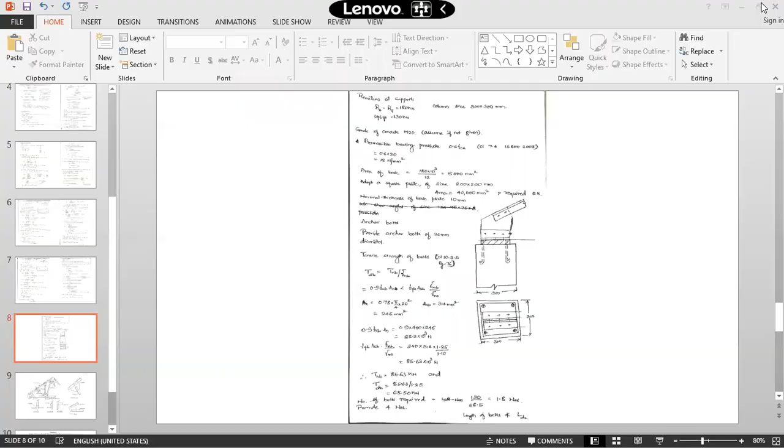Good morning. We have a very small part to be covered in the truss now. We are left with the design of base plate, which has to be explained to you. But designing the entire truss members, you have to practice them. I hope you have gone through this problem and tried solving it.

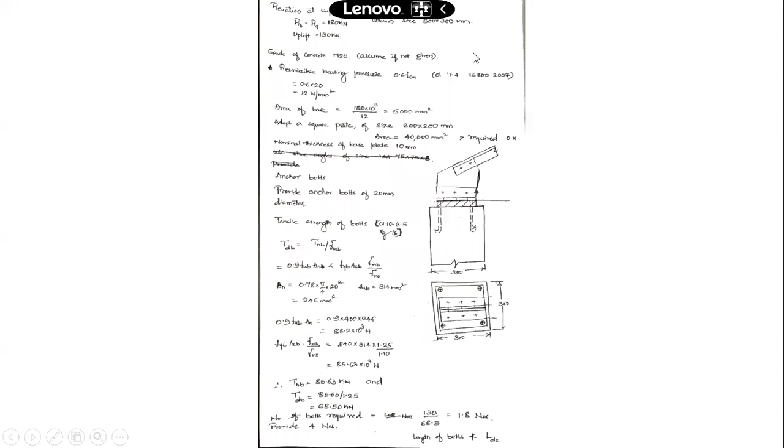Unless and until you practice, I cannot help you in any way. So once that truss design is done, this is the design of base plate, and this is what the base plate and anchor bolts have to be designed over here.

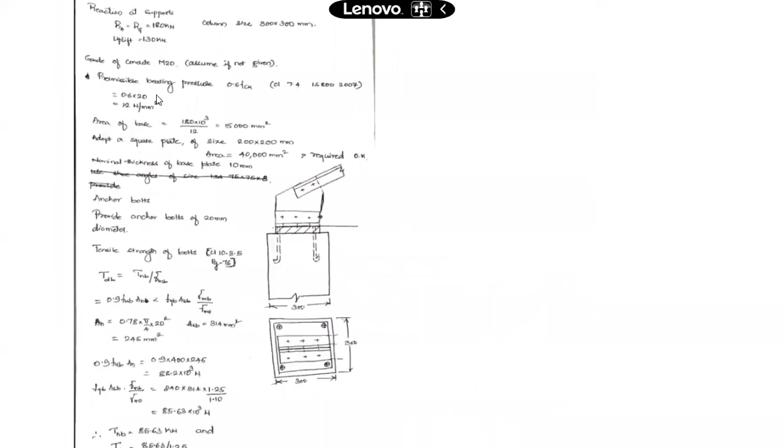In the beginning I told you there were some reactions given. I have taken these reactions. At the ends, over the support of the column, at points A and G, at the ends of the truss, you have the reactions coming over here. You have to design the proper base plate for these reactions.

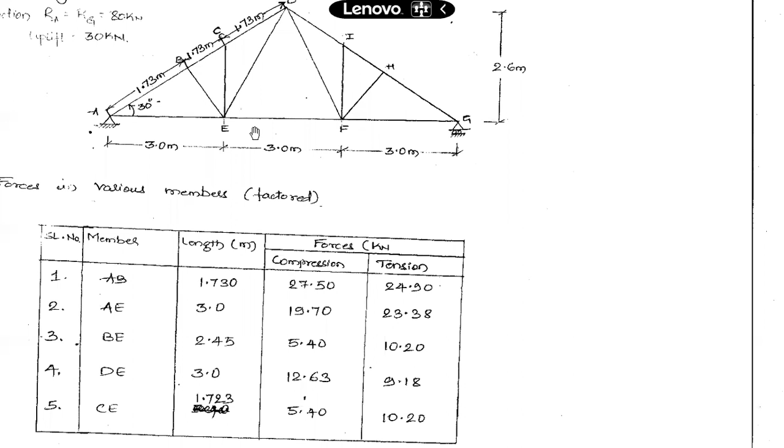There may also be uplift due to wind load, and to prevent the uplift or overturning of the truss, there should be proper anchoring arrangement. You should have bolts which will hold down the truss in position. So you need to design those anchor bolts. So first is design of base plate.

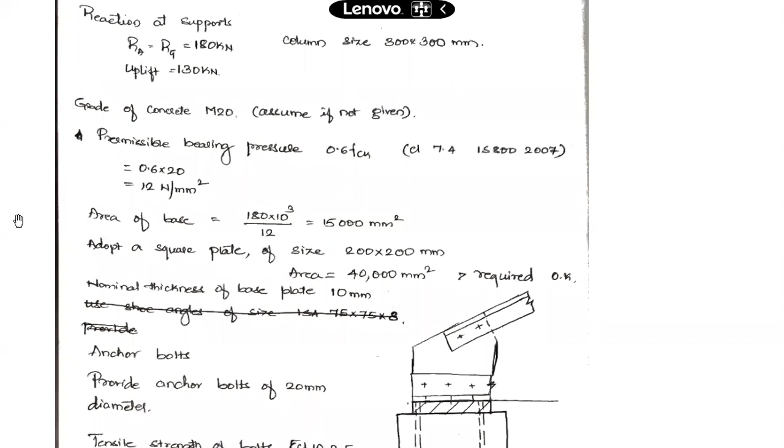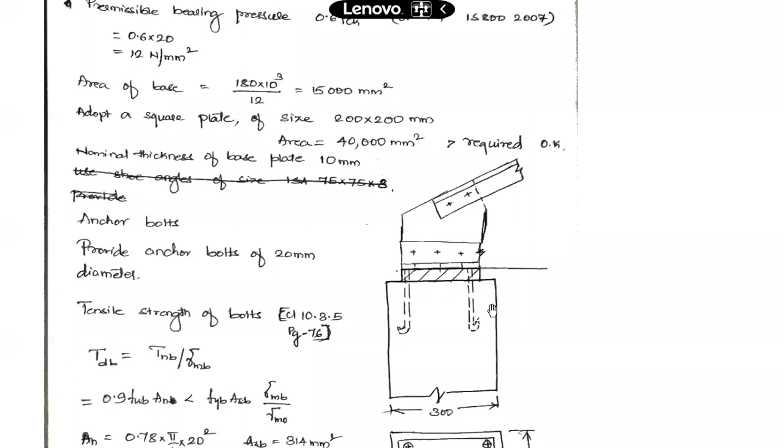Now this is a concrete column considered here. I cannot directly rest this truss on the concrete column. Normally it will result in high bearing pressure. If the angle section, the bottom tie member, is placed directly over the column, there may be crushing of the concrete at the edges, and the concrete may crack there.

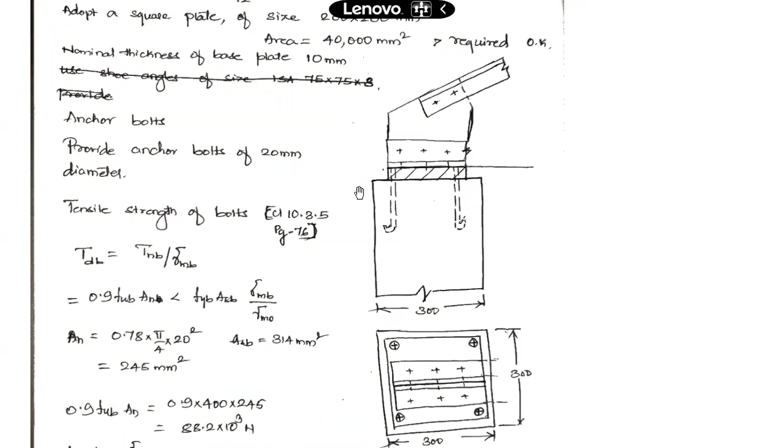To prevent this, and also to provide proper stability to the truss at the support, we need to have the base plate over there. We have to design that base plate and the anchor bolts for holding this base plate in position.

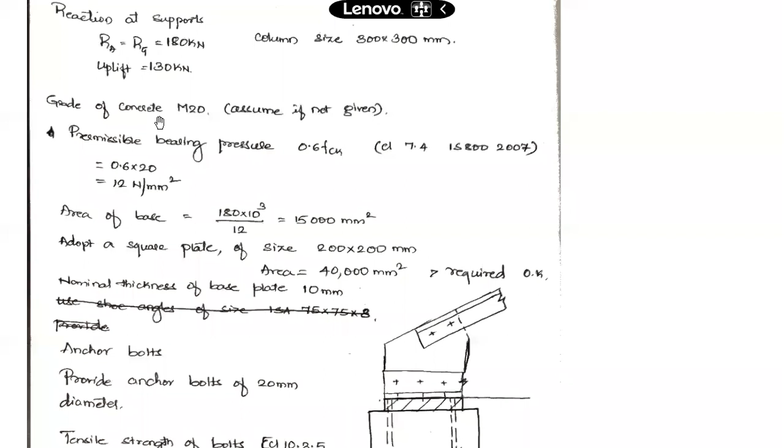So first, if you take up the design of base plate, these are the reactions at A and G. We have a reaction of 180 kilonewtons. The column size for this particular truss is 300 by 300 mm. And also there is an uplift force.

At the same supports A and G, this is a downward reaction, given as 180 kilonewton downward. What is coming here is uplift, an upward reaction. If the truss is trying to be uplifted by the wind load, there will be an upward reaction or force experienced there.

So this is due to dead load, 180 kilonewton, which will be in the vertically downward direction. This is a force in the upward direction due to the uplift experienced by the truss in any case.

Now this column is given as 300 by 300, and grade of concrete has not been mentioned in the problem. So what I have done is I have assumed it to be M20 grade. If it is not mentioned, you can go with this assumption. So now, what is the permissible bearing pressure?

This permissible bearing pressure is from our clause of IS 800:2007. If you go to clause 7.4, the permissible bearing pressure on the concrete should not exceed 0.6 times FCK. In our case, it comes out as 0.6 into 20, which is 12 Newton per mm square. This is the bearing pressure allowable on the concrete.

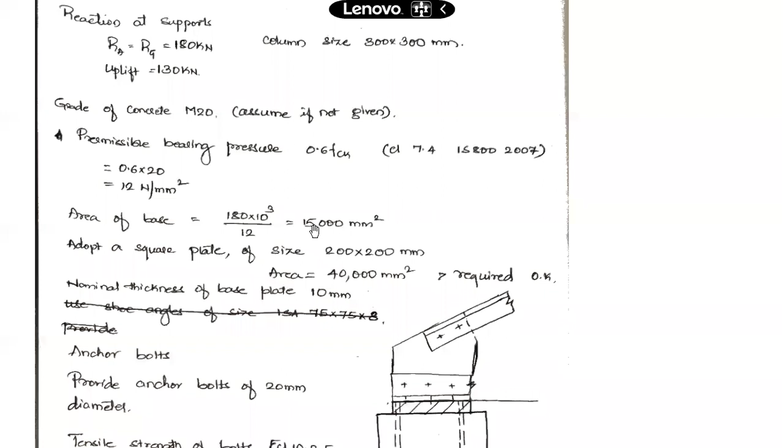So either 10 or 12 is sufficient. Out of these two, any one thickness you provide. This completes the size of the bearing plate. Plan area is 200 by 200 and thickness is 10 thick. That is one part, what has to be decided on the support, one of the member, bearing plate.

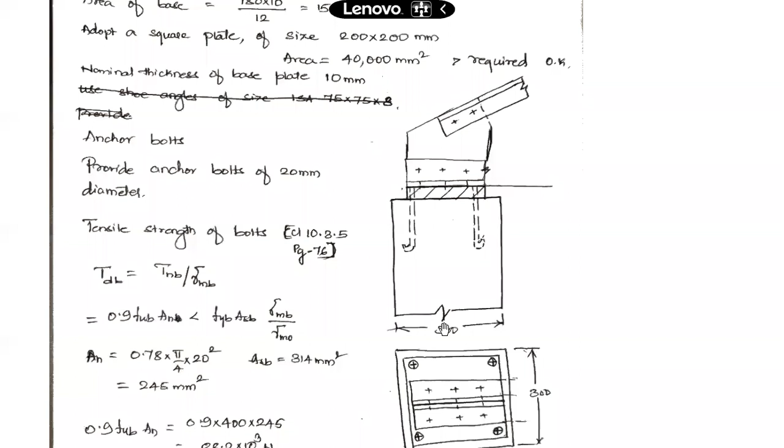Now, other than that, we have anchor bolts. This bearing plate, what we decided was based on the downward force, this 180 kilonewton force. Now, we also need to take care of this uplift force of 130 kilonewtons.

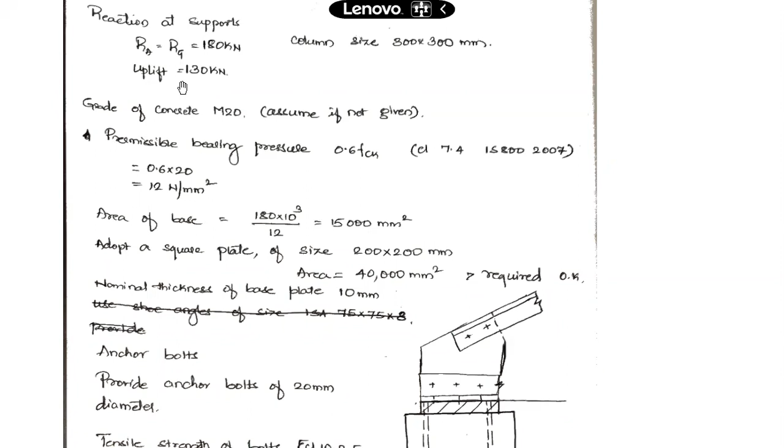So what you have to do is you need to provide proper anchor bolts. These are the J bolts. At the end, so you'll find such J hooks. They are mainly meant to have proper anchorage. So these bolts have to be provided here.

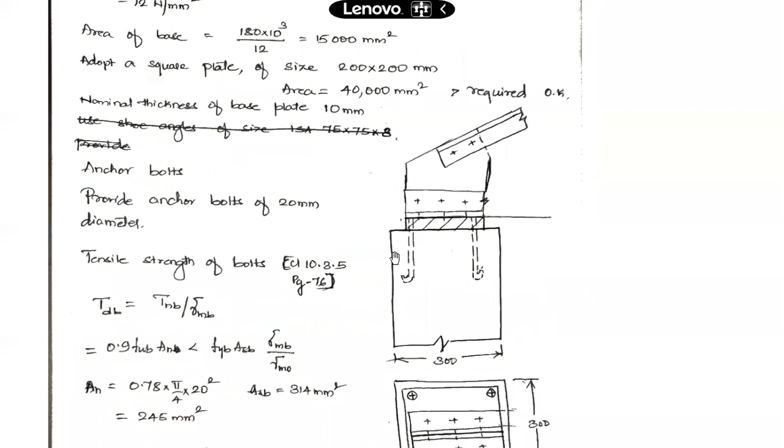So these anchor bolts will be based on what is the uplift force here. On that basis, we will decide the size of the anchor bolts. So if I adopt 20 diameter bolts, I have used 20 diameter as the anchor bolt size here. The class of bolts, I have taken the same class, 4.6 grade.

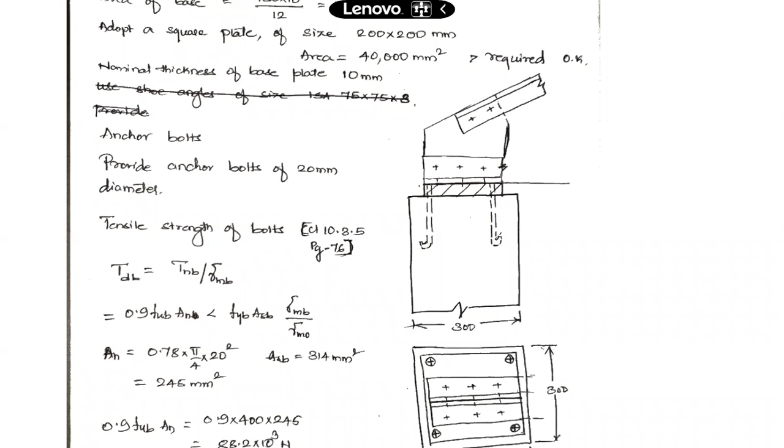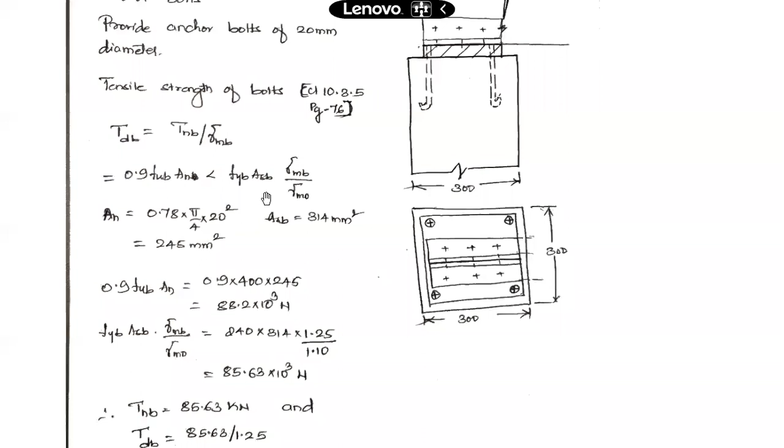So from this, what is the strength in tension? We also have design strength for these bolts under tension here. From IS 800 only, you will get those design tensile strength of the bolts.

Till now, what we have seen was the strength of the bolts under shearing and bearing. So these two strengths we have checked over there, we already have dealt with them. We have only come across such strength under shearing, single shear, double shear, or in bearing. That is what we have used.

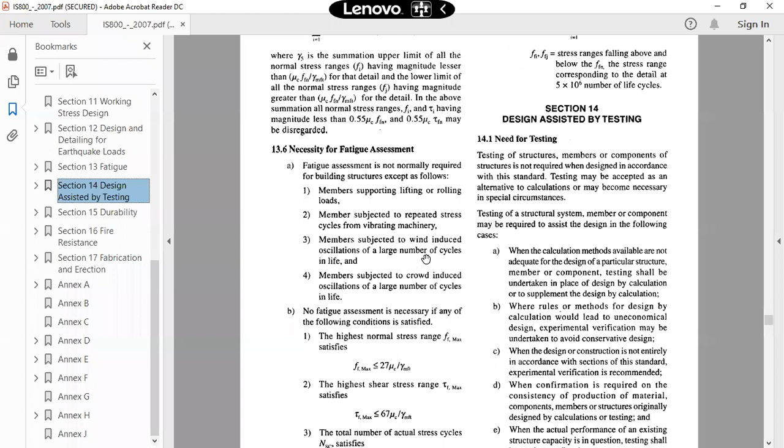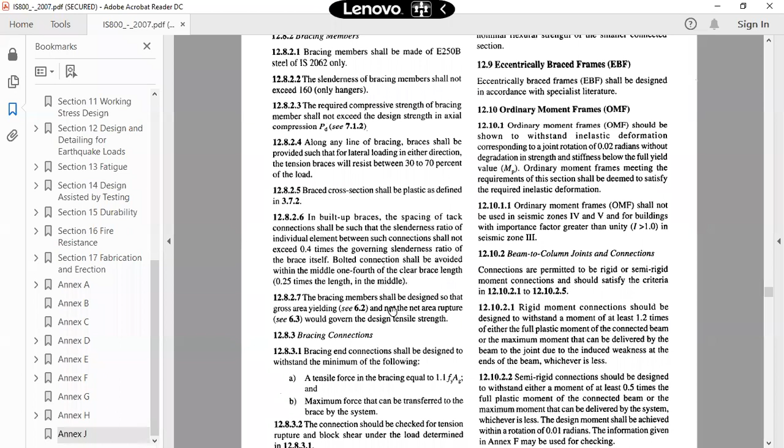But in this case, what is happening here is there is a direct tensile force that is being resisted by the bolts. So we have to decide what should be the size of the bolts based on that direct tension. So the clause you'll find that, and in that you'll also see that you can calculate the design tensile strength of the bolts.

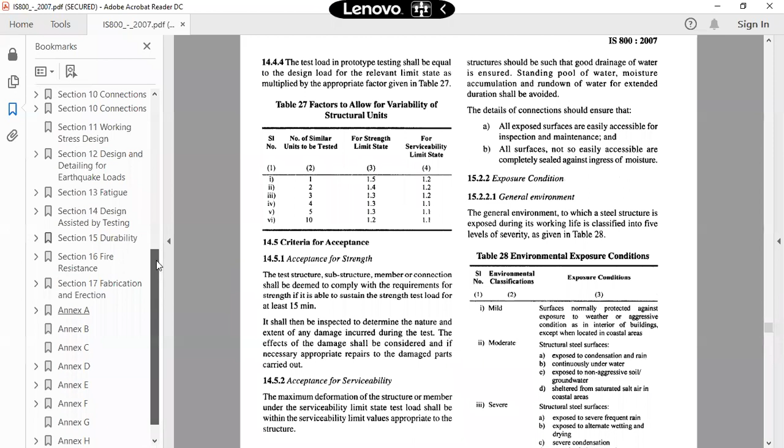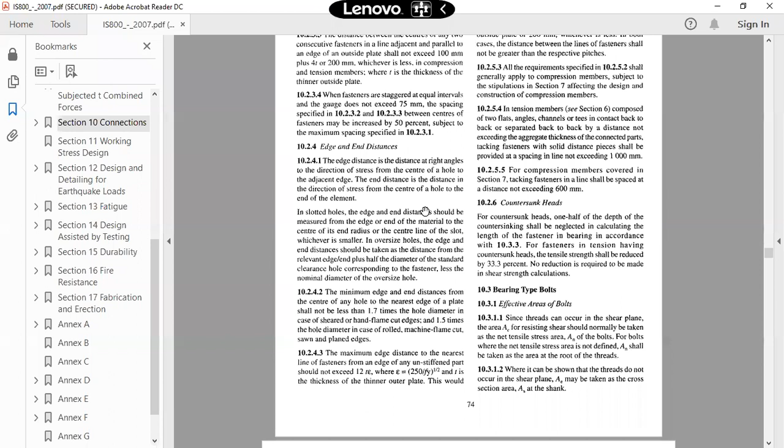Tension capacity, this is the tensile capacity of the bolt. TDB, which is equal to TNB upon gamma MB. Tension capacity of the bolts.

So this capacity, what I have mentioned here, is calculated from this clause 10.3.5. TDB, which is equal to TNB upon gamma MB, and TNB is to be calculated from this expression: 0.9 FUB, and that should not exceed FYB into ASB into gamma MB upon gamma M naught.

AN is the net area at the roots, 0.78 times the gross area, that is AN. ASB, the area at the shank portion of the bolt, which will be based on the nominal diameter or the gross diameter of the bolt, pi by 4 into whatever is the diameter of the bolt, that square. That is how ASB is calculated.

AN will be the net area, 0.78 times the gross area. FUB is the ultimate tensile strength of the bolt, and FYB is the yield stress of the bolt. Okay, gamma MB and gamma M naught.

Gamma MB will be 1.25, whether it is field fabrication or shop fabrication, this is the factor of safety for bolts. Gamma M naught, the factor of safety for yielding, is 1.1.

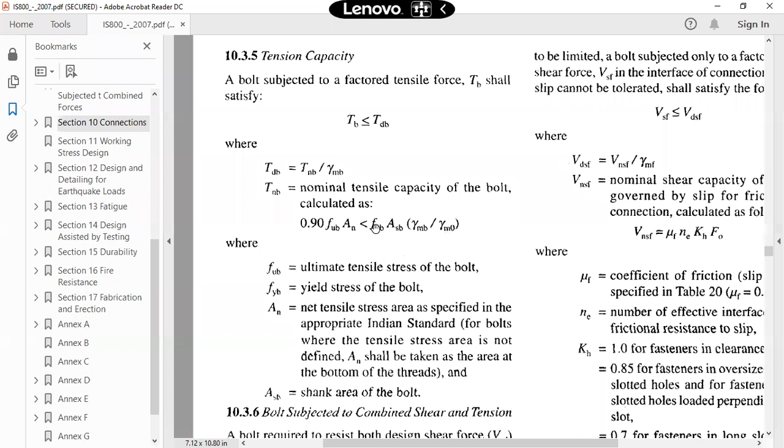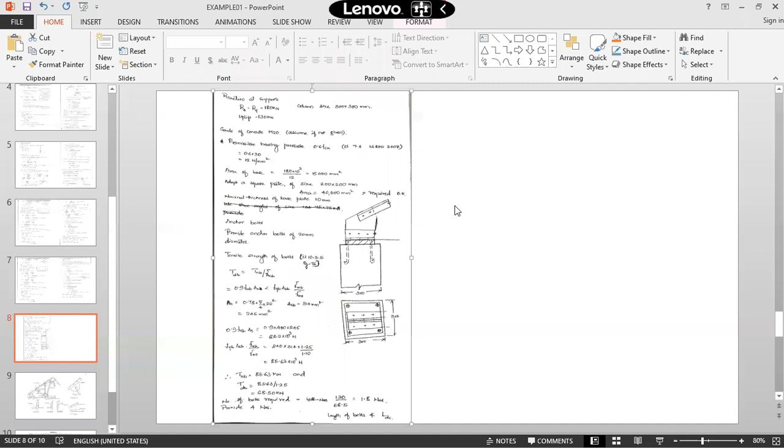So this clause will help you in determining the tensile capacity of the bolt, the design strength of the bolt under tension. I have taken that from clause 10.3.5, page 76.

Tensile strength of the bolt, TDB, which is equal to TNB upon gamma MB, and in turn TNB will be 0.9 FUB into AN, and you should check that it is less than FYB into ASB into gamma MB by gamma M naught. AN is 0.78 times the gross area.

0.78 into pi by 4 into 20 square, the diameter of the bolt, gives the net area of 245 square mm. The area at the shank portion is simply pi by 4 into 20 square, which is 314 square mm.

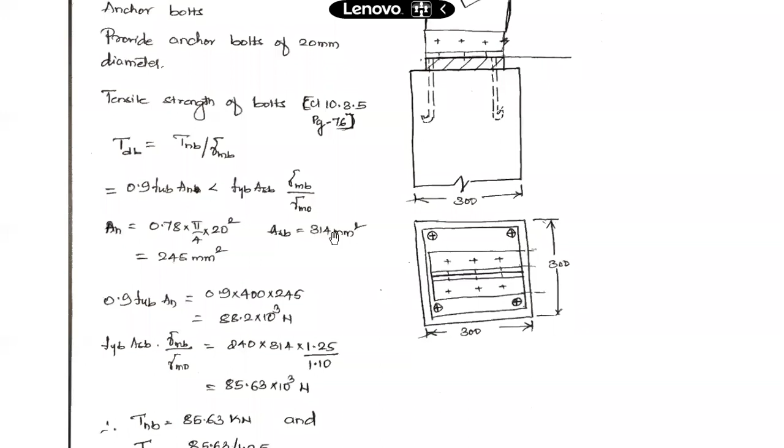On substituting in that equation, the nominal tensile capacity comes out to be 85.63. One term, 0.9 FUB into AN, gives 88.2, whereas the term on the right hand side gives a strength of 85.63 into 10 raised to 3 Newton.

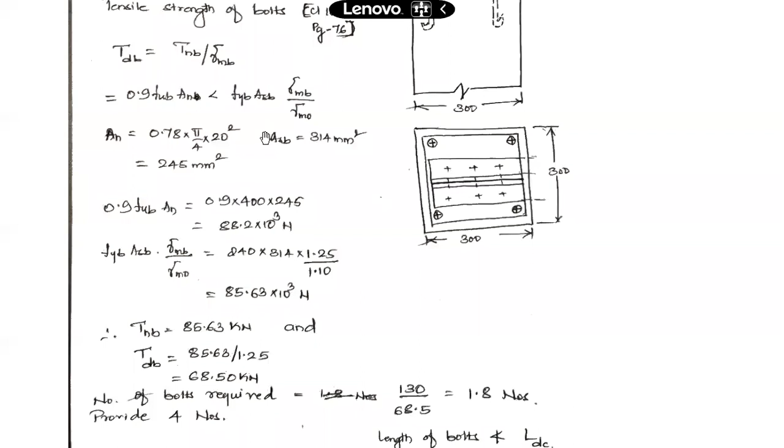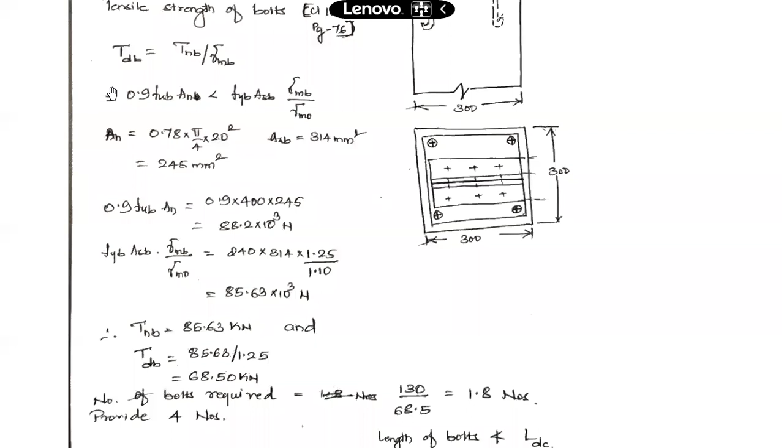Out of these two, whatever is least is adopted. This value of 0.9 FUB into AN exceeds FYB ASB into gamma MB by gamma M naught, so this 85.63 kilonewton, from FYB ASB into gamma MB by gamma M naught, has been taken as TNB here.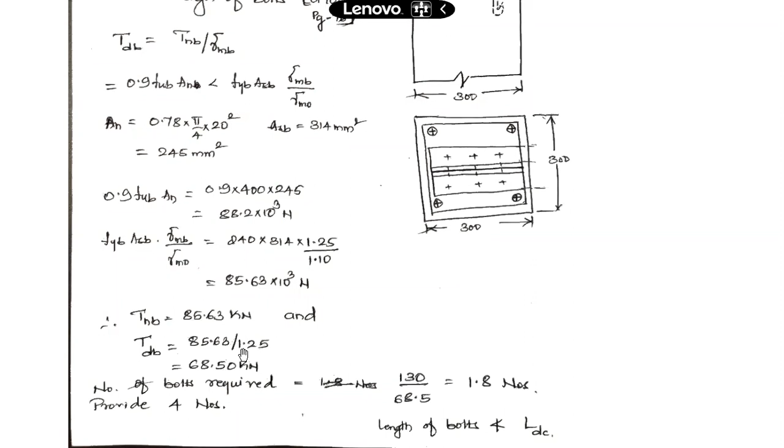So on this basis we have decided the design strength under tension for these bolts of 20 diameter. It will be 85.63 divided by gamma MB 1.25, which comes out to be 68.5 kilonewton. This is the strength under tension.

Is that clear? Like we did the calculation for strength of the bolt in shearing, single shear, double shear, and bearing, this is one more strength, what is there under direct tension. So that has been done over here.

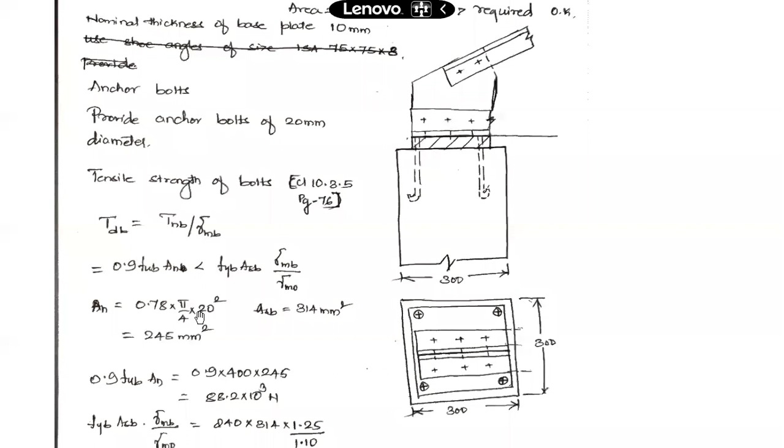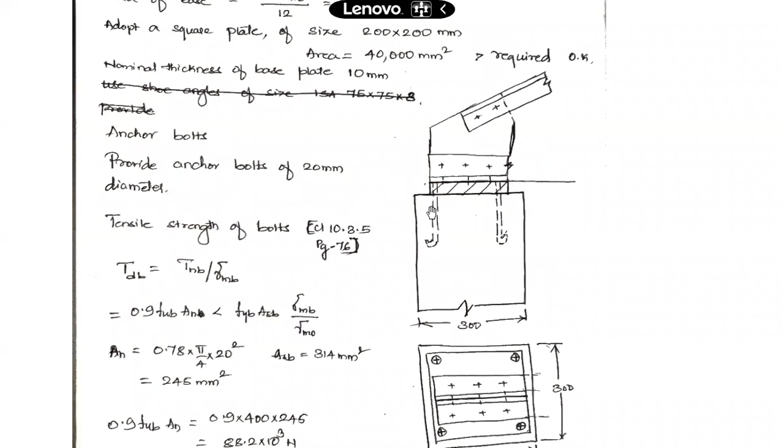Because these bolts are subjected to direct tension, uplift, direct pull is there on these bolts, so I need to know what is the strength under direct tension for these bolts. So this is what the strength is, 68.5 kilonewtons.

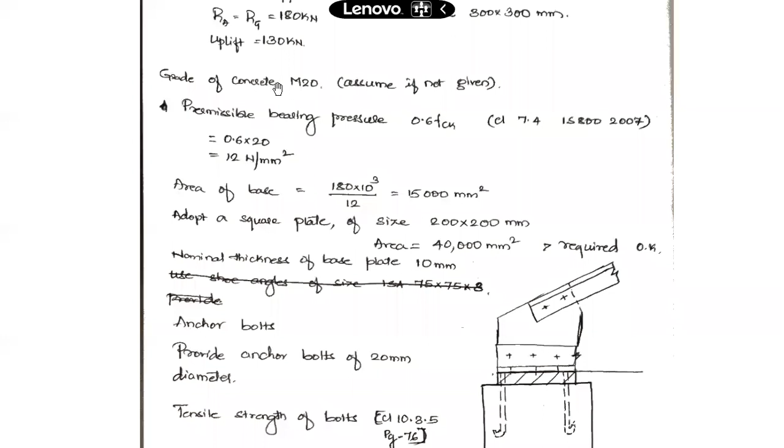Now what number of bolts have to be provided? Whatever is the uplift force, this 130 factored uplift force, 130 kilonewton, divided by strength of bolt, gives me 1.8 numbers. You require 1.8 bolts, but I cannot provide that.

What we'll do is provide 4 bolts, one at each corner of this base plate. Minimum 4 bolts have to be provided there, one at each corner of the base plate. Sometimes you may come across more than 4, in that case you can arrange them along the edge of the base plate. So here we are providing minimum 4 numbers.

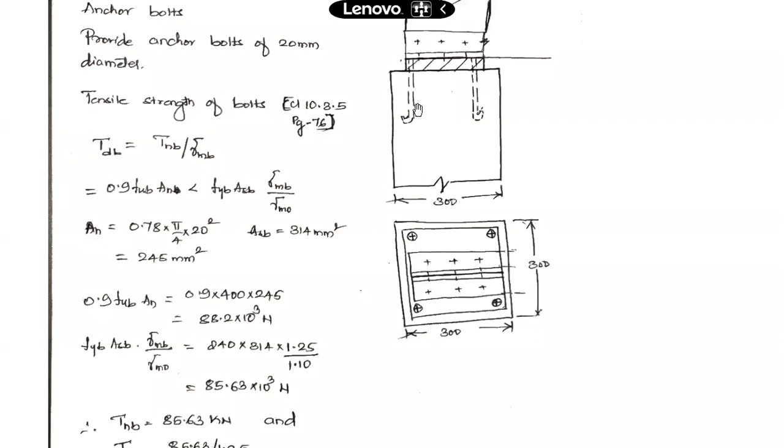So diameter of bolt is 20, number of bolts is 4, and also this length matters here, it should be having sufficient anchorage strength. So this length should be equal to the development length, development length in tension, that is the development length what you calculate for the reinforcing bar, LD.

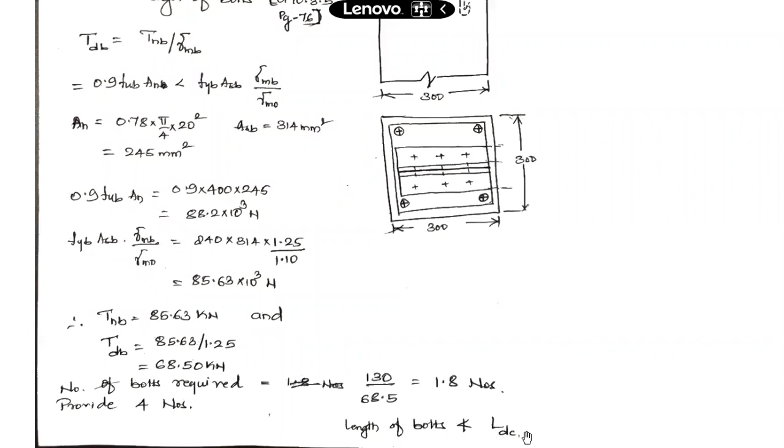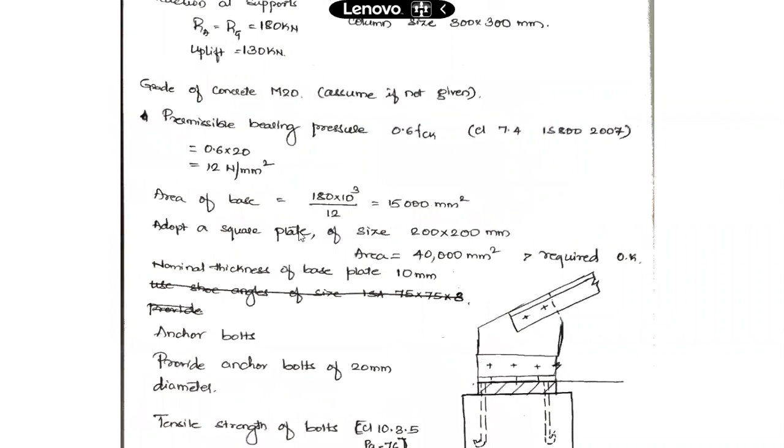You just mentioned that length of the bolt should not be less than development length, just LD, not LDC, LD, length of the bolt. So that is the anchor bolt and base plate design, what has to be done at the end of the truss design, this is one small part of that calculation.

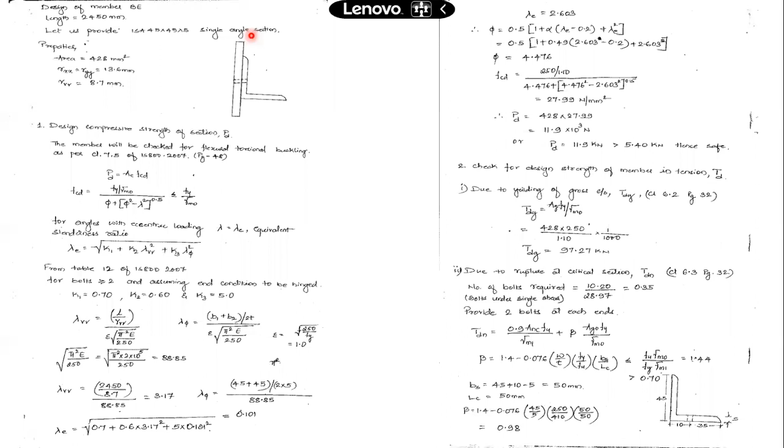So other than that, what we have gone through in this truss design is design of members, double angle arranged back to back for principal rafter and bottom tie. And one more type of design was a single angle section loaded through one leg only, which involved calculation of lambda E. And all members have to be checked for tension: design for compression, check for tension, or design for tension, check for compression, that has to be done there.

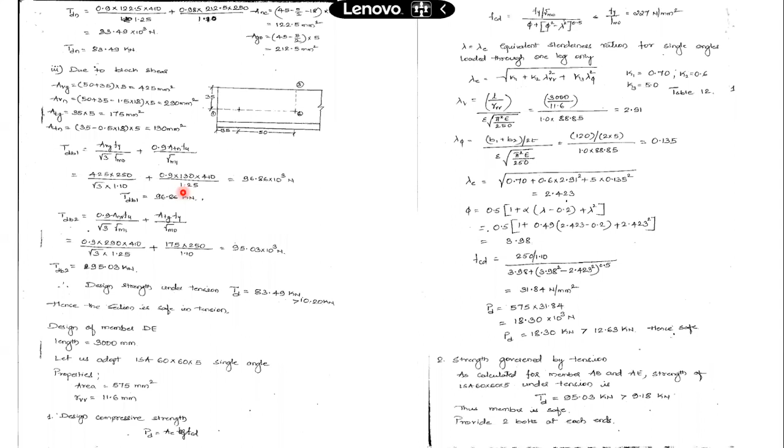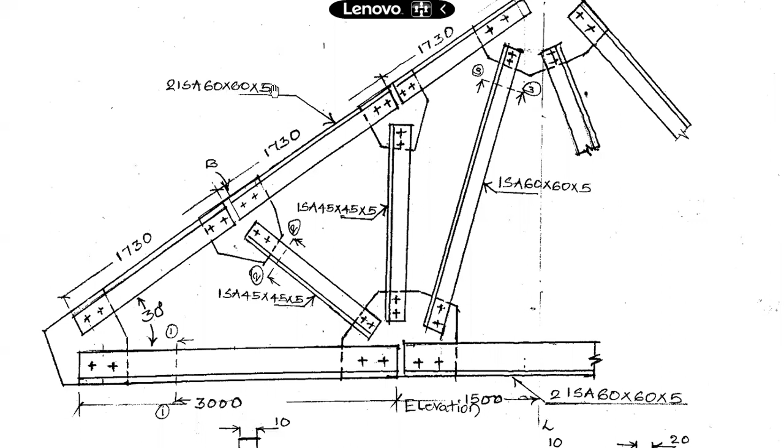Okay, so this is the connection part. This is the principal rafter. What is this member? Here we have provided two ISA 60 by 60 by 5 for this principal rafter.

For this bottom tie member, again it is 2 ISA 60 by 60 by 5. For these other members, here we have single ISA 45 by 45 by 5. For this vertical member also, we have provided a single angle section, 45 by 45 by 5. And for this member, which was 3 meters in length, we have provided a single angle section of ISA 60 by 60 by 5.

You'll come across this in your lab, in the semester detailing lab. There you have the detailing of this truss also. Once you design that in the lab, maybe the same truss or another truss, we will be detailing that.

At every joint you find these gusset plates. See that shape of gusset plate, they can accommodate the members which are connected over there. So this is the gusset plate what we have. For all, we have provided gusset plates of maybe 10 mm thickness. Yes, 10 mm thickness. So this is the arrangement of the members in the truss.

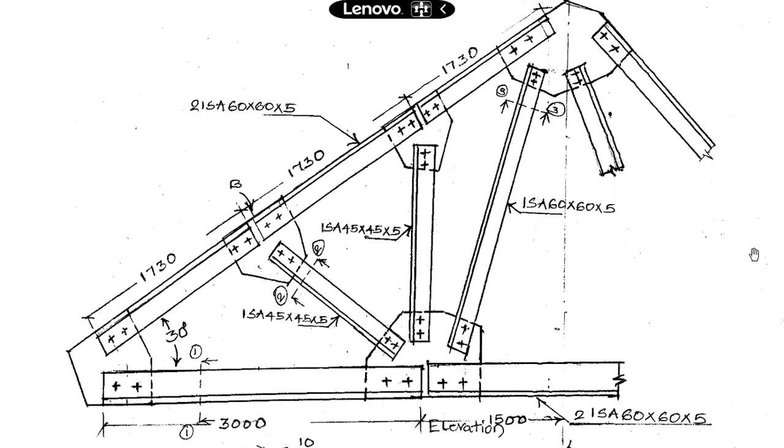Half elevation, at least the half elevation has to be shown, not the full truss. You don't have to draw the full truss, half you can draw. Anyhow you are doing it in AutoCAD, so if you are done with half, just mirror that and you will get the full truss. So this is the elevation of the truss.

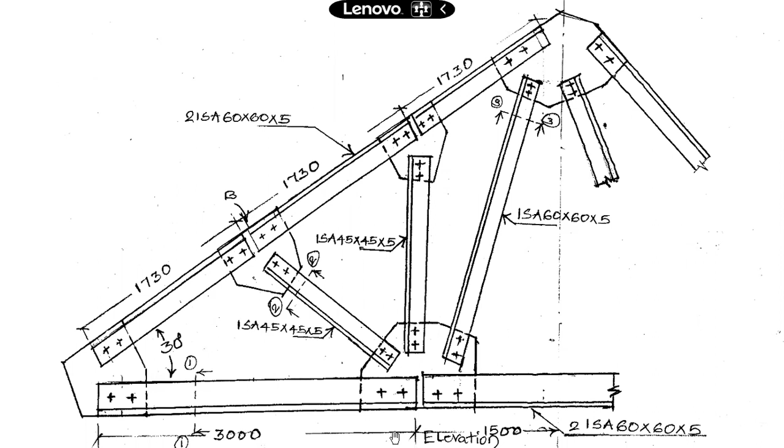Now the same sections have to be shown here, details of the joints and also the sections. So three sections: one of the bottom tie member, another section 2 for this single angle section member, and section 3 for one more single angle section. For this principal rafter and bottom tie member, the arrangement is same because they are the same angle section, 60 by 60 by 5, and they are double angle sections.

So here the arrangement of members within the truss, how they are connected back to back, ISA 60 by 60 by 5 back to back. This is section 1, which is taken at this bottom tie member. Okay, this is that section.

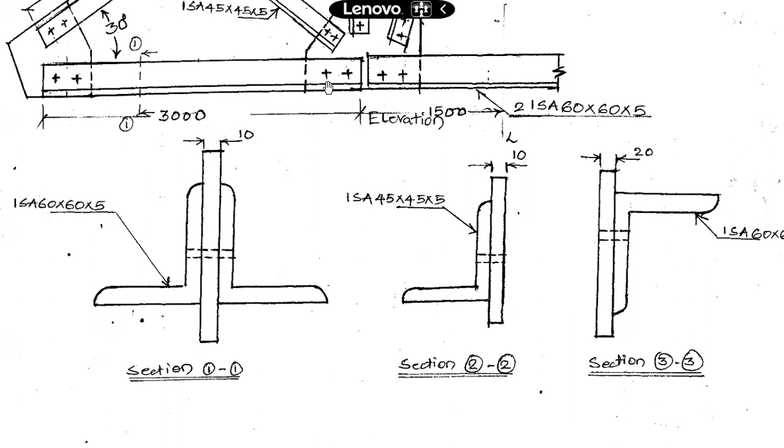This is the gusset plate in between, what you see. These are the bolts which have been provided. So in any connection for any member, we have ensured that we are providing at least two bolts.

So for this member, section 2, this is our section 2 for this member. Here it is a single angle section, ISA 45 by 45 by 5. This is the angle which is connected with the gusset plate. You can see the gusset plate when you take this section over here. So size of gusset plate is 10 mm.

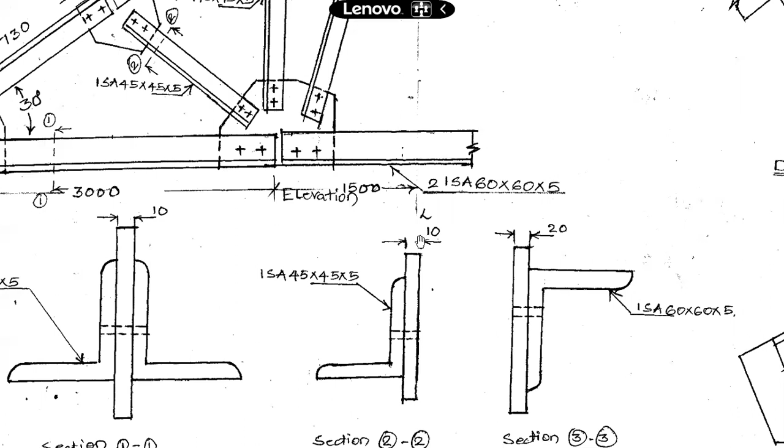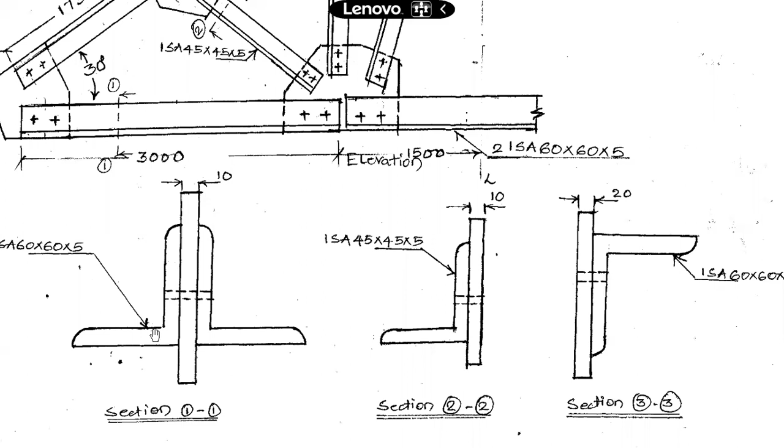Similarly, section 3 is over here for this member. So this is the member what you have, ISA 60 by 60 by 5 single angle section connected with the gusset plate. This is 10 mm, not 20. This is 10 mm. So these are the member cross sections taken at different points for the different members.

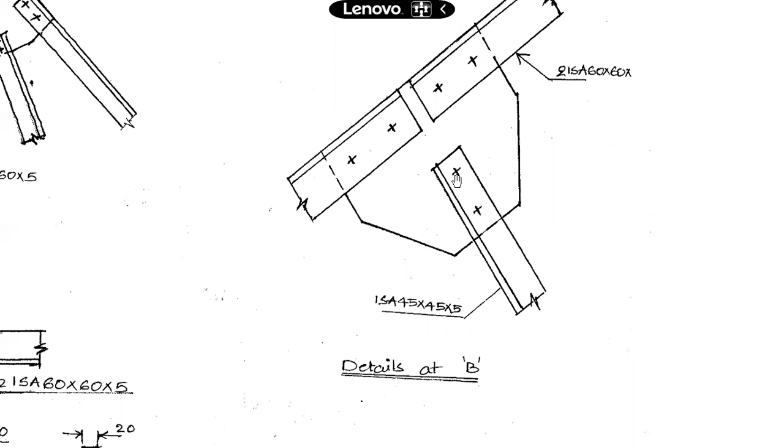So at this point at B, you need to just enlarge this joint with the gusset plate and show how the members are connected with this angle section, or this gusset plate, and mention what is the pitch and end distance for this connection. Or else you can write it over here if it's not possible to show in the diagram — just write what is the pitch distance and end distance.

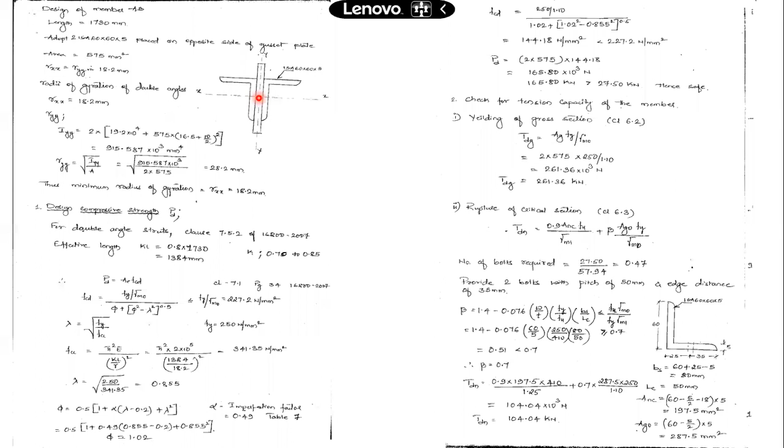That is what you have to do in your lab. In your exam point of view, you don't have to do all this drawing. Don't go for drawing these things, for the subject theory don't draw them. You can just show these sections when you are designing — like individual members, how they are connected with the gusset plate — you can show it in that form.

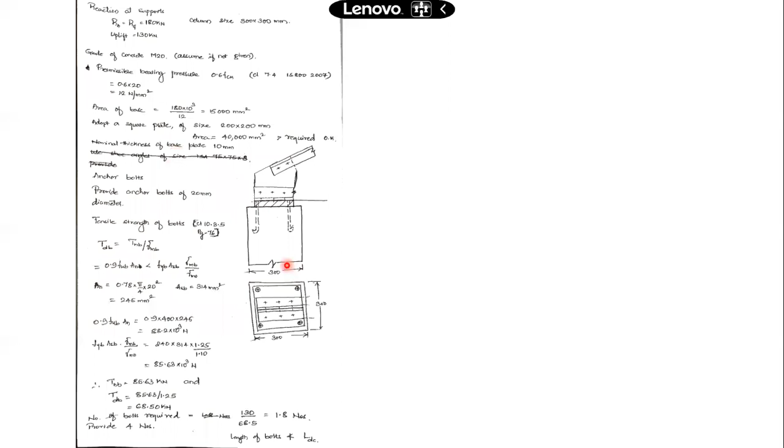Your problem will end with this part — designing the base plate and the anchor bolts. I'm just clarifying these connection details, the member details for you. This drawing is not required in your theory, it is not required in your theory. So this is the arrangement of the members — don't draw this, don't waste your time drawing this in your answer sheet. So, details at A and B.

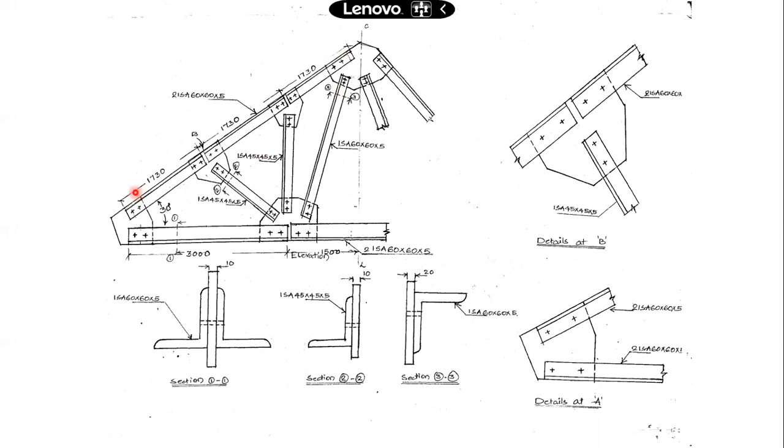In lab, we will again take up this problem. Since we have designed the entire truss, I'm just showing you where all these members are arranged. This is the detail at connection and the detail of the member.

I think I shared this problem already, and I want you to design this. It is almost the same truss, only the member forces are different. Some lengths of the members have been given here, others you have to calculate. This is the problem, an assignment problem for you to solve.

You have to design this roof truss, with forces in each member given in the table. The size of column is 300 by 300. You need to use M20 grade of concrete and design using M16 bolts, diameter of bolt 16mm, of class 4.6 for the connection.

It is also asked to design the anchor bolts. Base plate design is just one simple step: finding the area and its thickness. There is no design calculation you have to take up for thickness of base plate, you just adopt either 10 or 12 mm and design it.

Length of some members have to be calculated by you, from the geometry of the truss. These are the forces, and you take these as your factored force, whatever the forces are given here, you consider them to be factored force.

What change you can note here is the top chord is only under compression, tension force is not coming in, so you design only for compression. The bottom chord has no compression force, only tension, so you design only for tension. The diagonal member DE and DF experiences only compression, no tension.

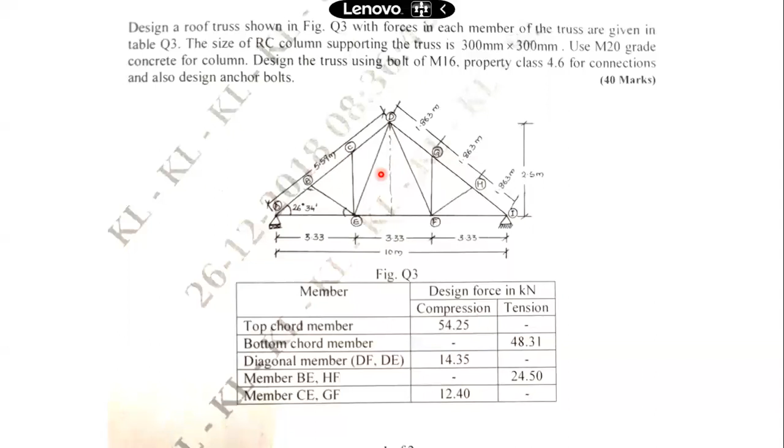So like that, the member forces have been mentioned. Here your job is to design for one nature of force, either tension or compression. That is how this question has appeared, so you can try solving this. That will be your assignment part. That is what you need to do in design of truss. If you have any difficulties, any part to be repeated, you can tell me.

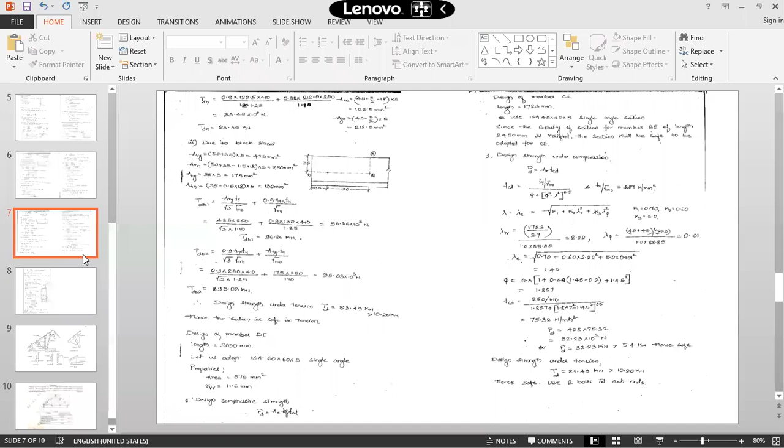You should be thorough in design of compression member and design of tension member. What you come across other than that is calculating the strength of the bolt and deciding the connection. This was the only part left out here. Other than that, truss design is completed.

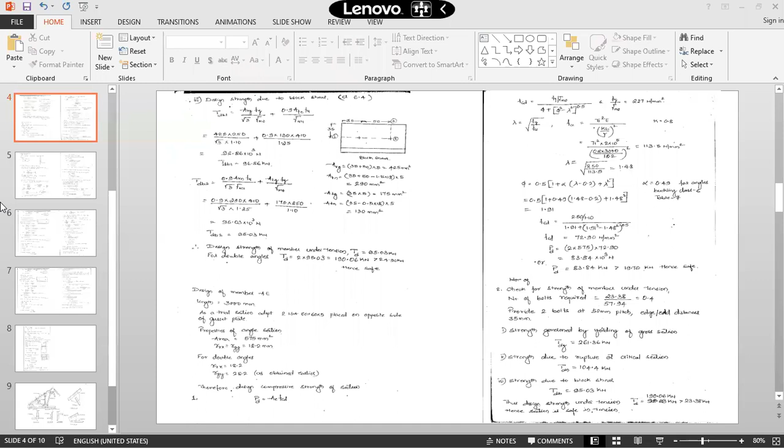The end question mentioned here, this has come to you already. Design the base plate and also the anchor bolts for this. The entire question has to be solved here.

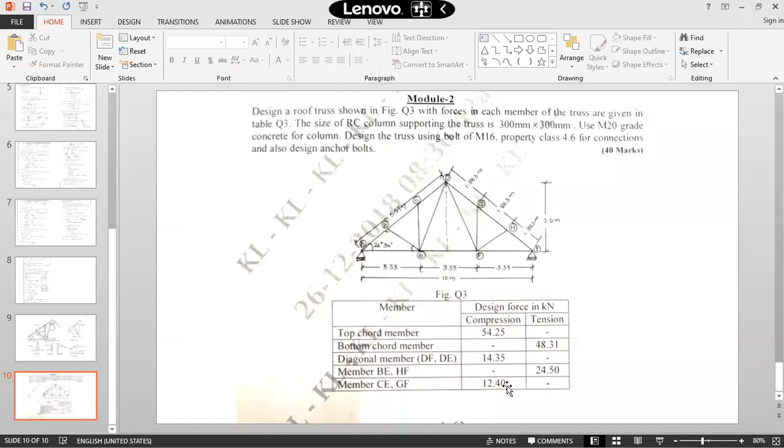Are you okay with that truss design? What did we cover? Because we have to move with the next part of our steel design, if truss is clear, if you have any difficulty. No, sir. If your answer is no, not a problem.